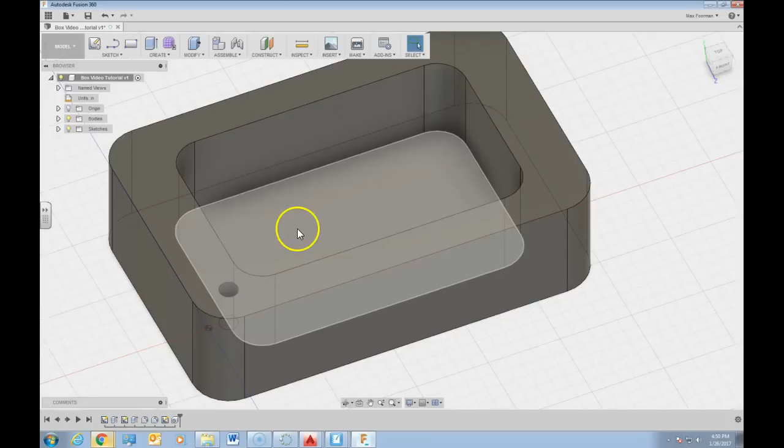Okay, so now we have our one simple hole here. We're going to make a slightly more complex hole feature now that's going to be an actual tapped hole. What that means in real life is there's actually features down inside of that hole that are called threads that allow a fastener to go in there.

So the call out that we have here is ultimately it's going to be a 10-32 tapped hole that goes down 187.5 thousandths. And the tap drill size that we're going to use is going to be a diameter of 177 thousandths of an inch to a depth of 1/4 of an inch.

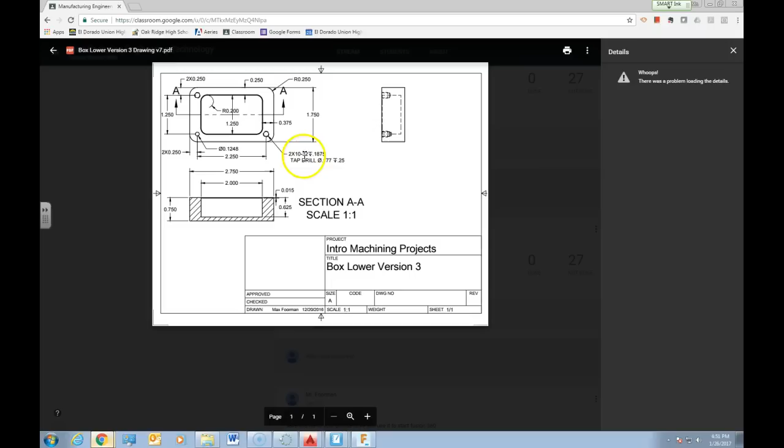Typically on engineering drawings, you don't want to specify this usually, but this is an educational thing. The purpose right now isn't to go look up a tap drill chart and all the rest, so I'm giving this to you right now. I'm going to be first making a hole this diameter right there.

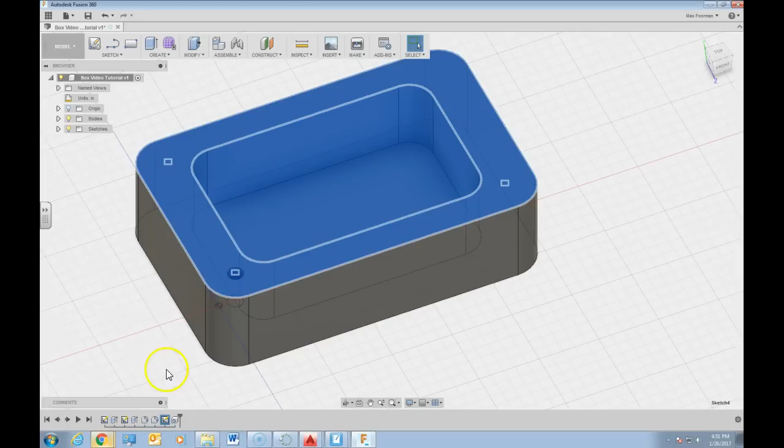Okay. So in the previous video, we had made this sketch with these 3 points. One of those points we have now used to make this hole feature. These other points, rather, we're going to use to make these other holes. So now we're going to come back here. I'm typing in on my keyboard the letter H for hole. All right, still a simple hole.

And instead of doing face point, we're going to want to come back here to sketches, come down here to sketch number 4. I'm going to turn the light bulb on so I can actually see those right here and have something to select. So guess what I'm going to do? I'm going to select now that point and that point.

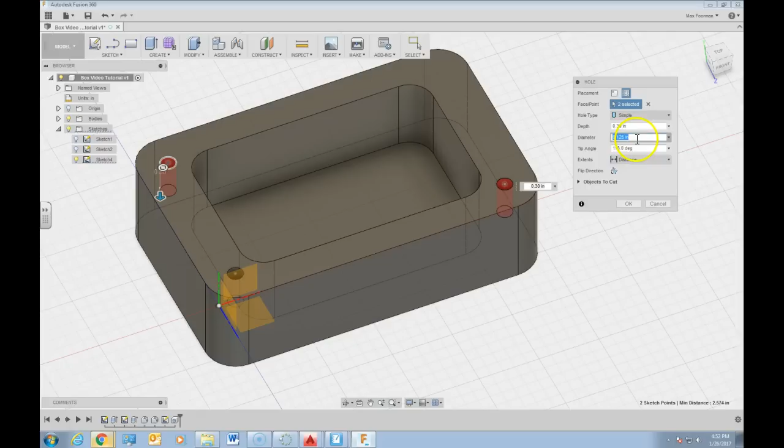From the previous time that I used this hole wizard, it kept the values from before, a diameter of 0.125, not what I want now. It's going to be 0.177 diameter, so that made those slightly bigger. The depth, 1/4 of an inch, so 0.250. Easy enough there. That's what I want. I'd already assured that those are in the right place based off of the sketch. Click OK. Awesome. I've got 2 holes.

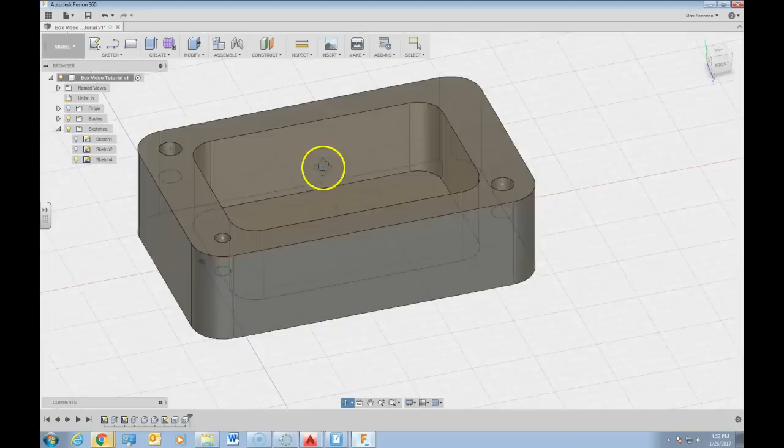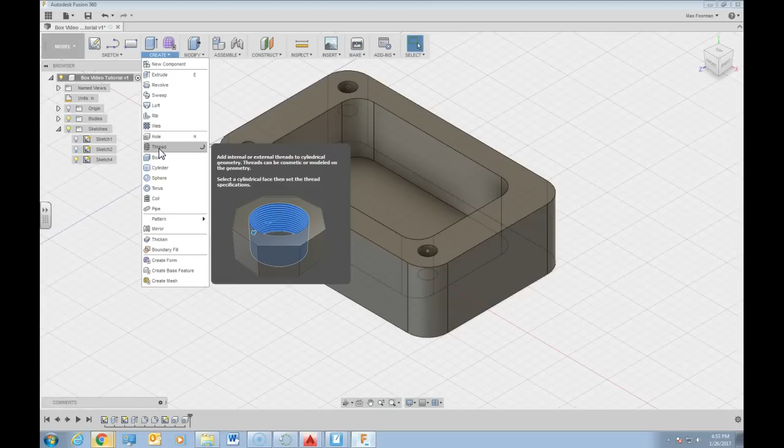But there's more going on in those holes than just a straight walled hole. What we need to do next, I can go isometric view to see this. Under create, coming down here below the hole, there's this thread feature. You can read that quickly: add internal or external threads to cylindrical geometry. Threads can be cosmetic or modeled on the geometry. Select a cylindrical face, then set the thread specifications. So here we go, thread, clicking on that.

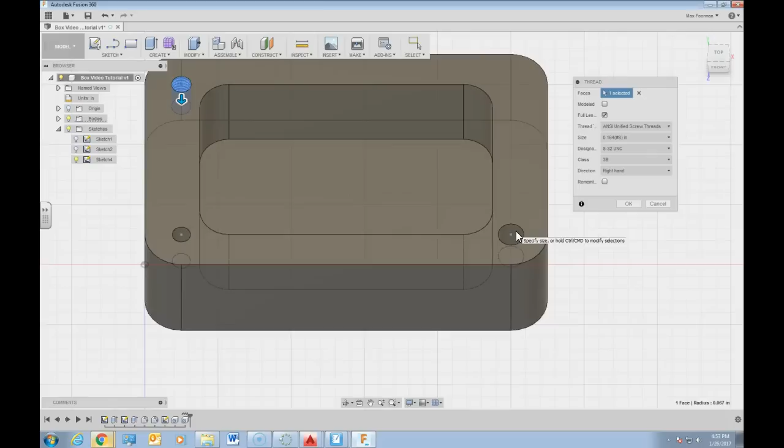Faces, I want that face and one more face. Is it going to let me do it? Oh, so here, this has been a little bit challenging. For some reason, it's only allowing me to do one face at a time, which is making me a little unpleased right now and scratching my head why Fusion 360 is wanting this to be that difficult. But anyway, I've got one feature here selected.

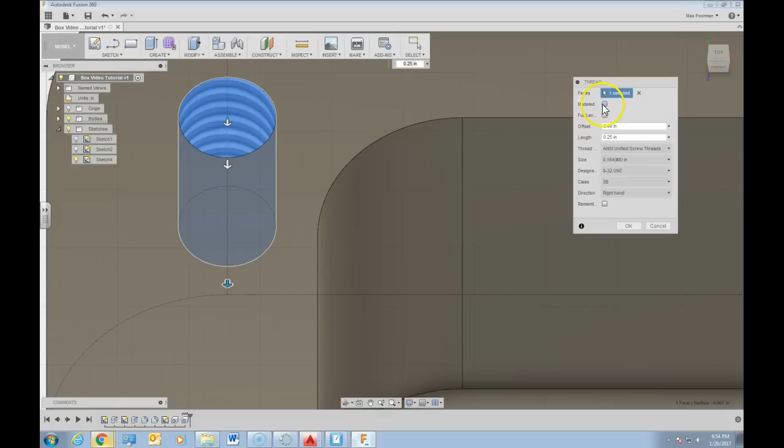I'm going to deselect full length right now, and I will select modeled, and we'll see what the difference is. So that's modeled. Ooh, that's kind of cool. It's actually like putting a helix in there. If I turn off modeled, it is just kind of cosmetic. If you see this on a part, it looks kind of like threads, but it's not really. Well, click modeled just for kicks, and that looks pretty. Okay, but not full length.

Offset here. If you were to plug something in here, this would be like distance from the top of the hole, I believe. So if I were to type in right now like 0.1, now it doesn't start the threads until 100 thousandths below the top edge of that part, which is not at all what I want. So I want to go back to 0 there. Pulls them back up to the top.

Length here, I've said in the drawing that I want that to go 187.5, or 3/16 of an inch is the fraction that's equal, deep. So length here, 0.1875. Now here we go. ANSI screw threads. That's what we want. That's typical Imperial American thread form. Metric profile is not what we want, but you could use that, or ISO metric profile. But that's good.

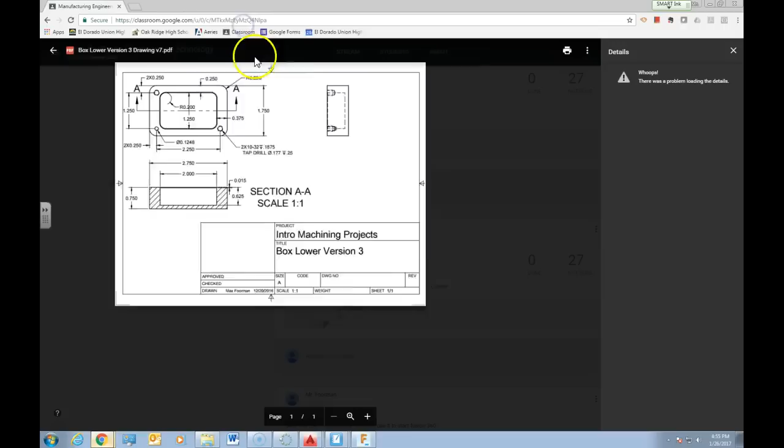And then size here. This is now where we get to decide. What we want here is actually a number 10 size. And again, you can look back at that on the drawing. Number 10-32. We'll save the specifics of threads for a later date. So what we want here then is number 10.

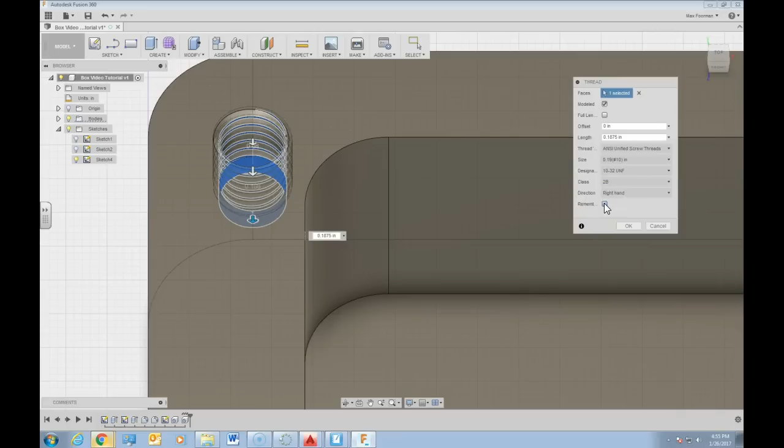Designation, instead of 10-24, we want a 10-32. 2B is really more standard. Right hand, that's great. And then remember size. Well, I guess we could, but we'll click OK. Look, we have now just modeled threads in on that feature.

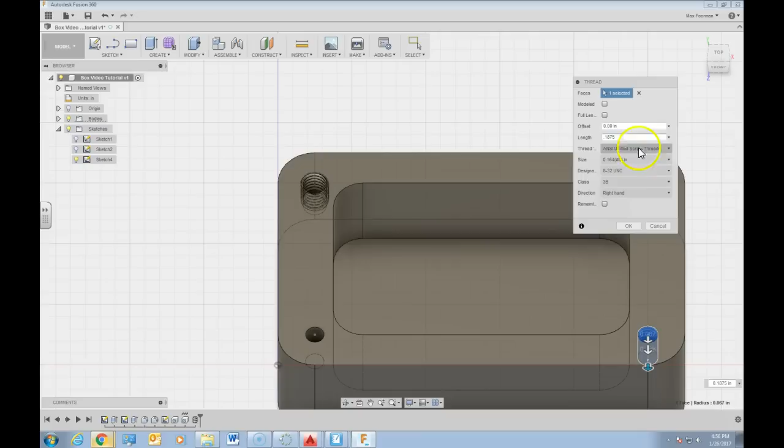And again, now we'll do H hole, oops, excuse me, we already had a hole, but now we want to do threads. Again, just to walk you through this, thread. Here, we're going to come in with an auto size. It's not really figuring that out particularly well on its own. So again, I'm deselecting that, 0.1875. I'm going to go with number 10, 10-32, 2B. And this one isn't modeled right now. Oops, that one's just cosmetic threads.

If I want to come back in and edit something related to this, now in this timeline down here, I've got 2 threads. If I click on that, that relates to those. Click on that, that relates to these. I'm now right-clicking on that, and let's see if it allows me to edit. It should. I'm going to hit escape. Right-click again. Ah, there we go. Because I had it highlighted already, I think it threw it off.

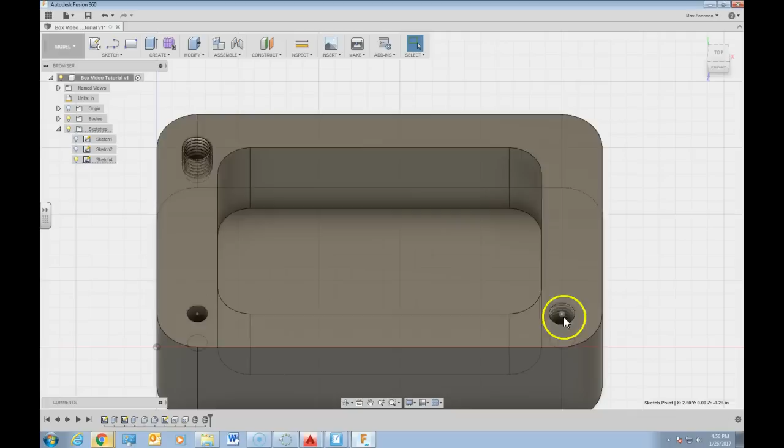So if I do that and then try this, now it's allowing me to edit feature again. There we go, edit. And then I can come back, click on that radio button there for modeled. And now I have 2 modeled threaded holes. Very good.